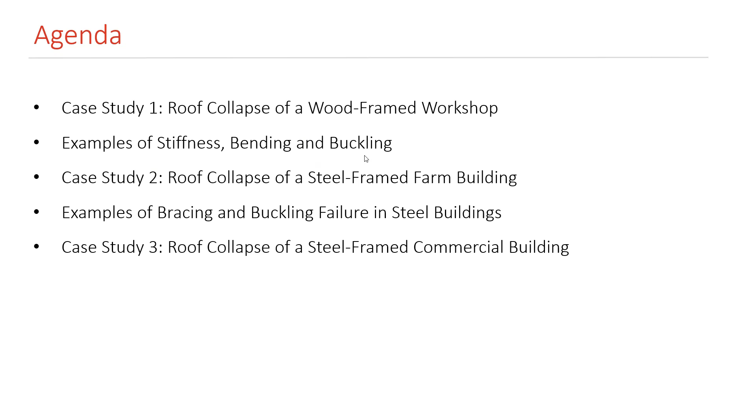In this presentation, I want to present 3 case studies. Case study 1 is roof collapse of a wood-framed workshop, and then I'll go through some examples of stiffness, bending, and buckling, and talk about the fundamentals of these 3 concepts in structural engineering. In case number 2, we'll talk about roof collapse of a steel-framed farm building, and then we'll give examples of bracing and buckling failure in steel buildings. Case number 3 is roof collapse of a steel-framed commercial building.

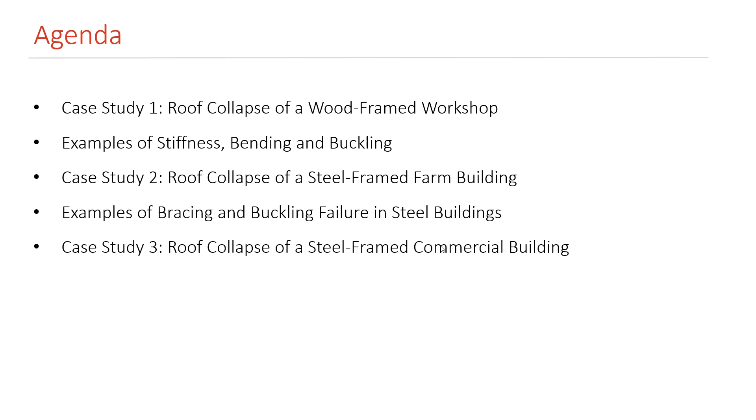Okay, so case study number 1: roof collapse of a workshop under snow. It was a mixed-use building. The areas included storage, workshop, and lean-to garage.

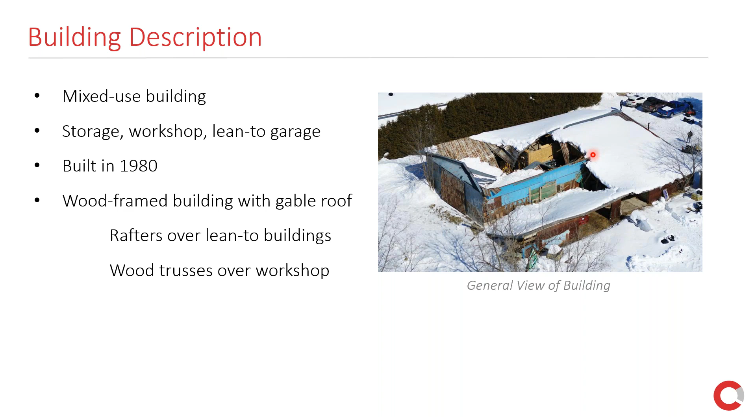This is the main area of the workshop, and there was a lean-to garage here. It was built in 1980, and it was a wood-framed building with a gable roof. There were rafters over the lean-to buildings. Here we have a lean-to garage, and there was another lean-to storage area here. The roof of these areas were framed by rafters, and there were wood trusses over the workshop. So the roof of the main building, the main workshop, was framed with wood trusses.

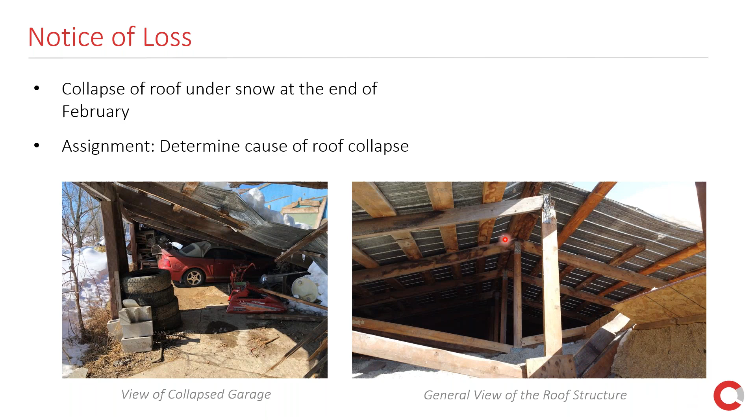So we started investigating. We attended the scene, took a look at the roof trusses over the garage, and also the lean-to garage, and also the trusses over the workshop and the rafters over the lean-to garage. The roof of the lean-to garage was framed with 2x10 rafters at 4 feet, and the roof of the workshop trusses -- we didn't see any lateral bracing between the trusses. Usually between the trusses there should be continuous horizontal bracing, complete with diagonal bracing. But we didn't see that; as you see here, there is none.

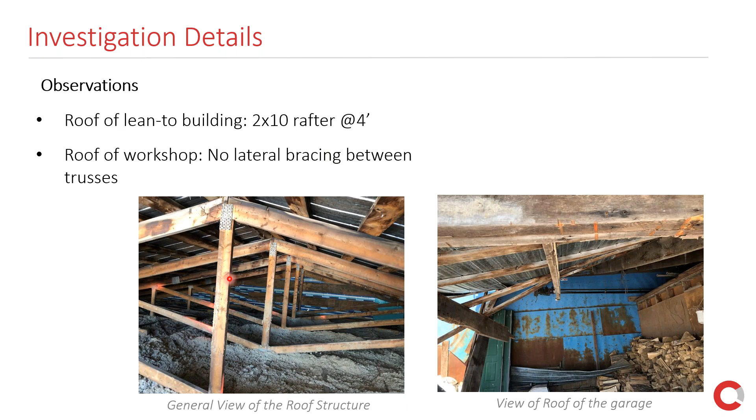Now, in this example, I want to particularly talk about the collapse of the roof trusses. For the lean-to garage, the rafters were not designed properly and they were widely spaced. But there are a couple of points I want to talk about regarding the collapse of the roof trusses.

So we did some code review to see why the roof collapsed. Maximum ground snow on the date of loss was 50 centimeters. Maximum wind gust on date of loss was 55 kilometers per hour. And this was a farm building, so we looked into the Canadian Farm Building Code of 1975. The design ground snow load was 3 kPa, which is equivalent to a design ground snow depth of 86 centimeters.

This means that if the building was built to satisfy the requirements of the code at the time it was built, it should have carried up to 86 centimeters of snow without collapsing. But it collapsed under 50 centimeters of ground snow load.

There's another thing I should mention here. When we say ground snow load of 50 centimeters, the amount of snow on the roof is different than the ground snow load. There's a formula to convert ground snow load to roof snow load. But regardless, those formulas are similar whether we go from actual ground snow load to roof snow load, or from design ground snow load to roof snow load.

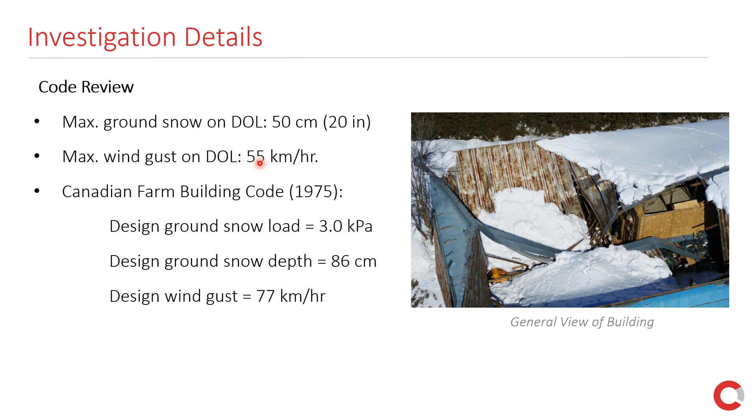If it was designed properly, it should have resisted the snow on the date of loss. Design wind gust was 77 kilometers per hour, so if designed properly, it should have resisted that. But on the date of loss, the wind gust was only 55 kilometers per hour. So at this point, we can rule out ground snow, snow load, or wind gust. These two are not the culprits.

Now, here's the thing. If everything is perfect, if the snow load is exactly uniform, if the material of the trusses is exactly homogeneous, and if all the trusses are exactly vertical, then no buckling or collapse would happen. But this is almost never the case. You have some irregularities in every structure.

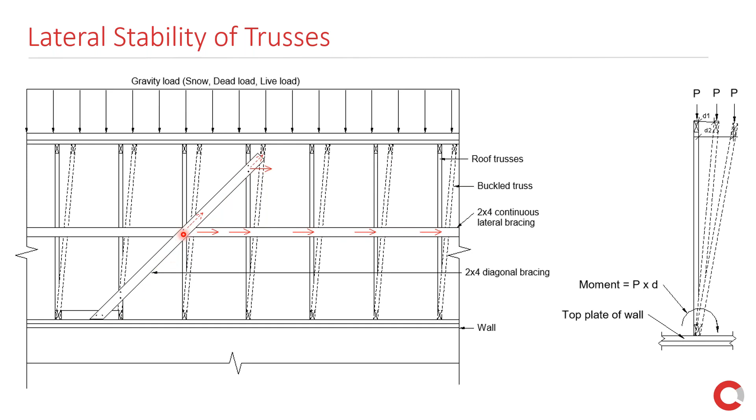Now, if you didn't have the horizontal brace, sure, the diagonal brace could prevent this truss and this truss from buckling or collapsing, but this other truss could collapse because it would not be connected to anything. So you need a horizontal brace—they call it collectors—to collect all the forces of other trusses and take it to the diagonal brace, from where the force can go to a support.

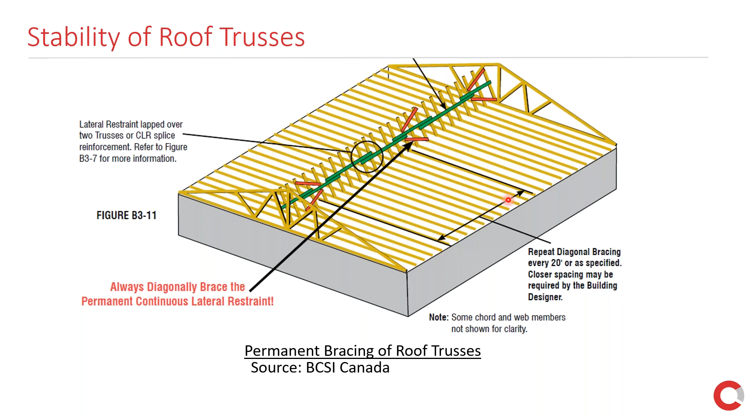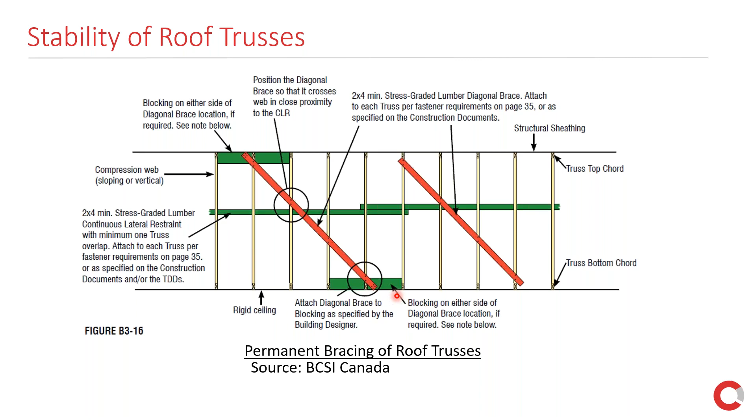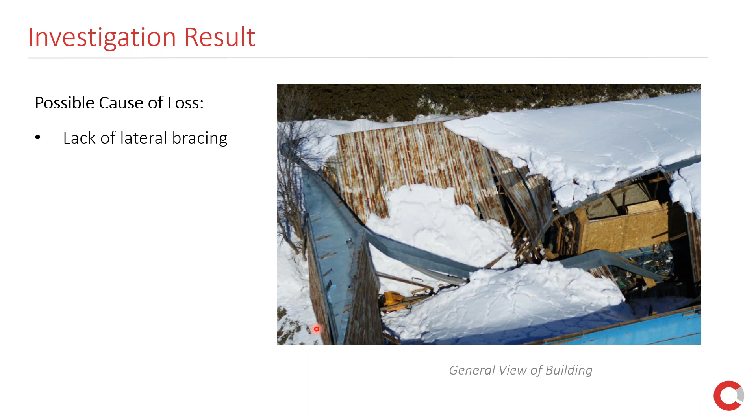So the possible cause of loss we determined to be lack of lateral bracing. Now, if the roof had been inspected before, the owner could have installed lateral bracing, and that would have prevented this collapse. So this is how it could have been prevented.

Before I go to the second example, I want to mention a couple of concepts in structural engineering. I want to talk about stiffness here. Stiffness is the difficulty to deform an object. The harder it is to deform an object, the stiffer that object is.

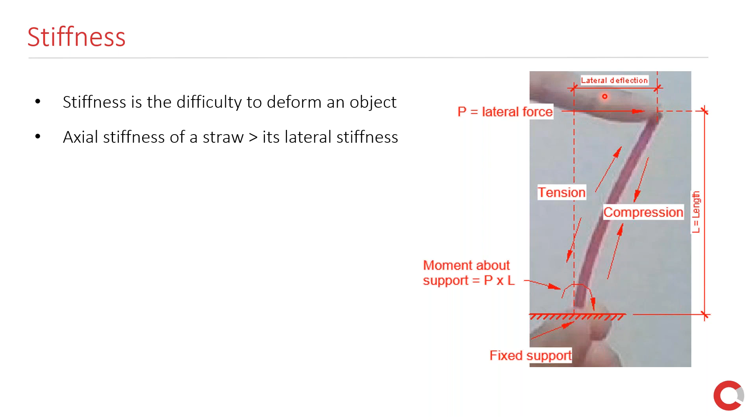For example, we say the axial stiffness of a straw is greater than its lateral stiffness, meaning it's stiffer in the axial direction. Here I'm holding a straw, and if I put a lateral force at the top, I can easily deform it by, let's say, 2 inches. I'll talk about these other forces later. Now, if I hold the straw at the bottom and try to pull on it, I cannot pull it by 2 inches.

So we say it's very stiff in the axial direction and very flexible in the lateral, or flexural, direction.

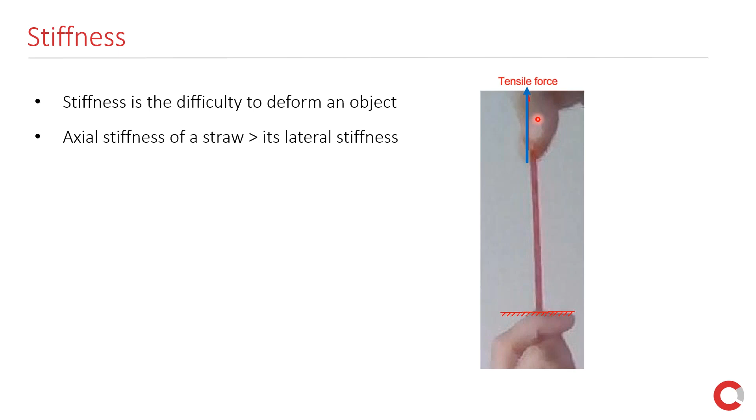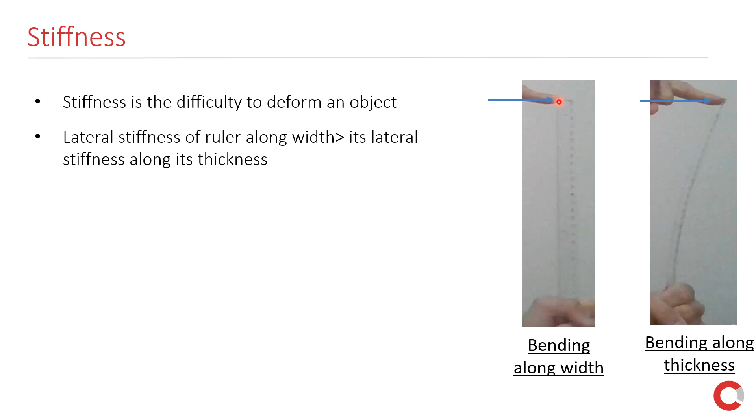Lateral stiffness of a ruler along its width is larger than its lateral stiffness along its thickness. Here I hold the bottom of the ruler, and I can easily push the top by 2 inches. But if I hold it the other way, I cannot easily bend it like that. So in bending, one side is in tension, the other side is in compression.

Imagine when you do a side stretch, one side of your body is in tension, the other side is in compression. Similarly, let's say you have a column. When it's under lateral load, which can be wind or earthquake, when it bends, one side is under compression and one side is under tension.

The bottom should be fixed to resist that bending moment, and this is how we show a fixed support in structural engineering. Now, if the bottom is not fixed, the column can easily tip over, so it should be either fixed at the bottom or have adequate bracing. The flexural stiffness depends on the cross-section of the member, its length, and its material.

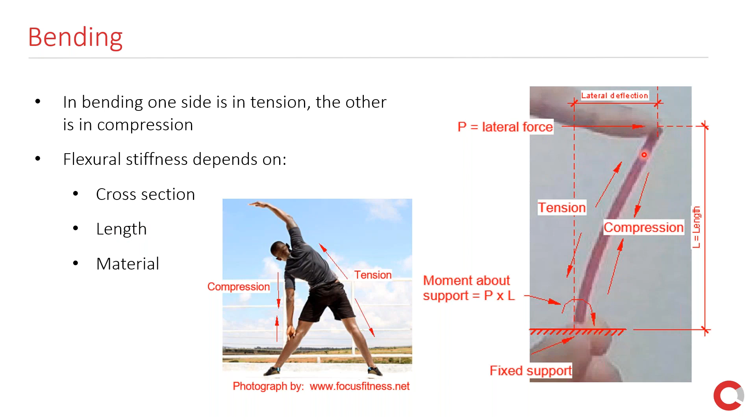For example, let's talk about the ruler. The ruler's cross-section is just a rectangle, with thickness and width. Not only is the cross-section important, but also the orientation of the cross-section with respect to the orientation of the force.

So the same ruler, if the width is along the force, shows very stiff behavior in bending. But if the thickness is along the force, it is very flexible. So not only the shape of the cross-section is important, but also its orientation with respect to the lateral force.

Length of the member is also important in flexural stiffness. Here I'm holding the bottom of the ruler. If I were to hold it at mid height instead, I would have to push eight times as hard to bend it by 2 inches.

Material is important too, of course. If it was a steel ruler, it would be stiffer.

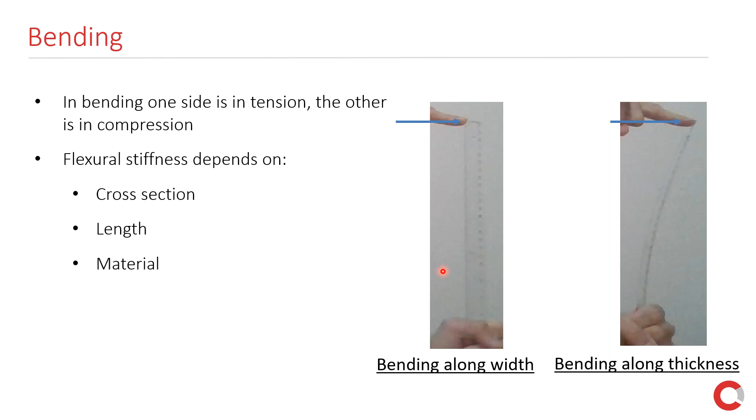The properties of the material in a ruler or any object can be different from one point to the other, just a little bit, but still different.

The ruler might not be exactly straight, it might be bendy a bit. The force might not be exactly at the centroid of the cross section, and for a column, there can be vibrations or wind, so there are lateral forces that make the column bend.

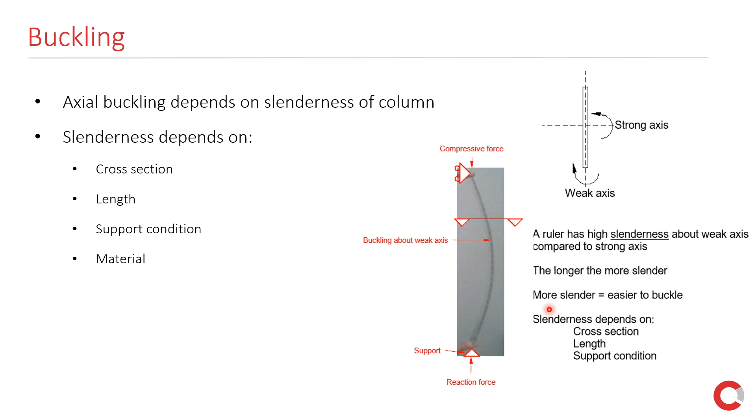The longer a column is, the more slender it is, and more slender means it's easier to buckle, and slenderness depends on these factors. Now let's talk about buckling mechanism.

Compressive buckling is due to a combination of axial force and progressive deflection. Under compressive force, let's say there is some very small deflection, d, at the midspan of the ruler. Here you have a pin, and this force P times this d creates a bending moment at the mid-height of the column.

Now, if the column does not have enough flexural stiffness, this d keeps increasing, and the bending moment keeps increasing to the point that it breaks. But if the column has enough flexural stiffness, this deflection increases a little but at some point stops. So buckling depends on the stiffness of the material.

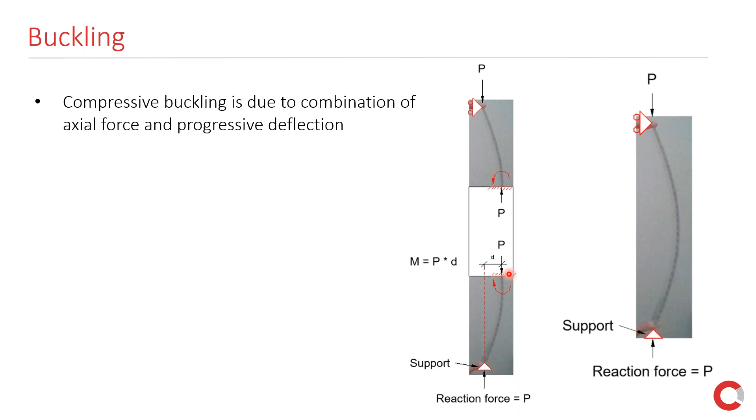Having said all this about stiffness, bending, buckling, and bracing, let's talk about case study number 2: roof collapse of a steel framed farm building. This was a steel shelter built in 1960, a 3-hinge portal frame on strip footing.

A portal frame has a pitched roof and columns. There are 3 hinges, 1 at the top and 2 at the bottom. When I say hinge, it means it can easily rotate. The cladding of the building was sheet metal panels on the roof and walls.

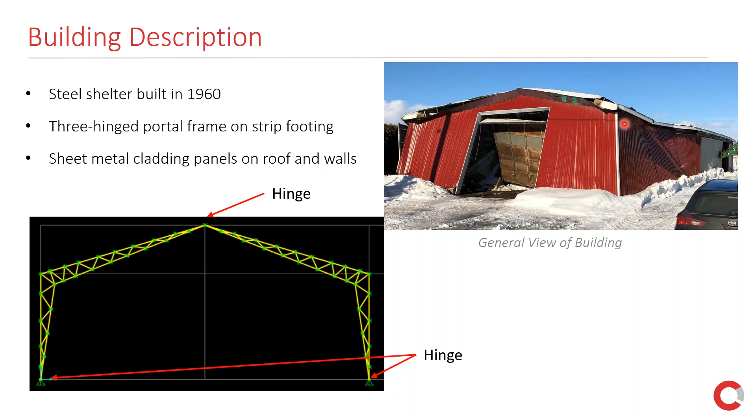You can see the general view of the building and of course the collapsed shape. This is the general view of the roof. You can see the roof steel trusses, and here you can see the vertical trusses.

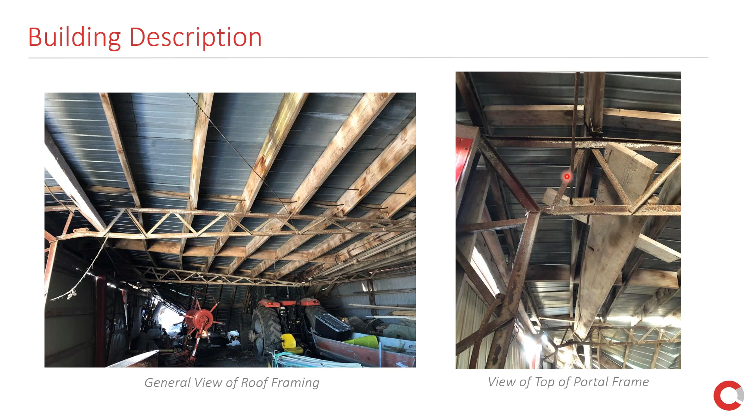Again, a part of the roof truss, and also these rods bracing the bottom chord of the roof truss. Another view of the roof structure, and the collapsed shape of the trusses.

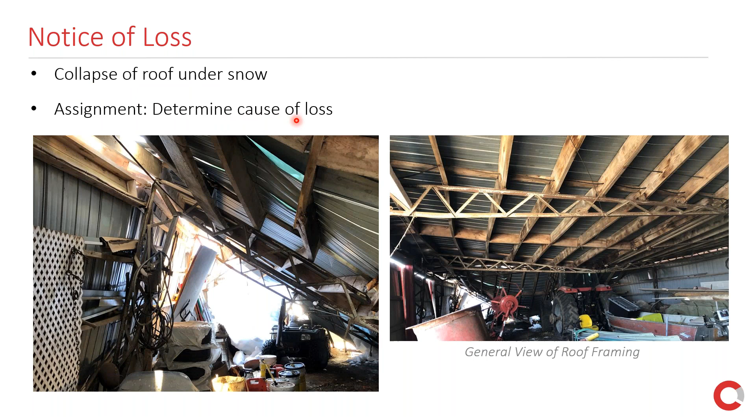The notice of loss was that the roof collapsed under snow, and our assignment was to determine the cause of loss. So we started our investigation, looking at the failure pattern or failure shape of the roof.

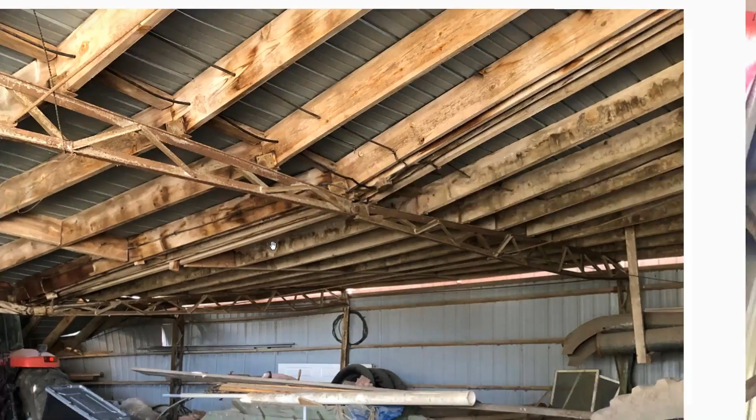You can see, first of all, this is the middle of the roof, and this is a hinge. I'm going to zoom in here so you can see this is a bolt, it makes it a hinge at the top, that's why we call it a 3-hinge portal frame. You can see these 2 trusses at the bottom have buckled in the same direction, so the bottom chord has kicked out to the right.

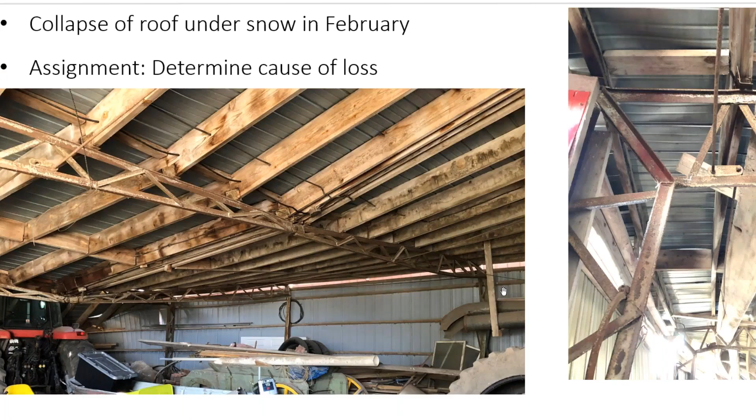Here's another view of the connection of the roof truss, the vertical truss, and the bracing. You can see the buckling of the chord again. This is the hinge, and this is the bottom chord.

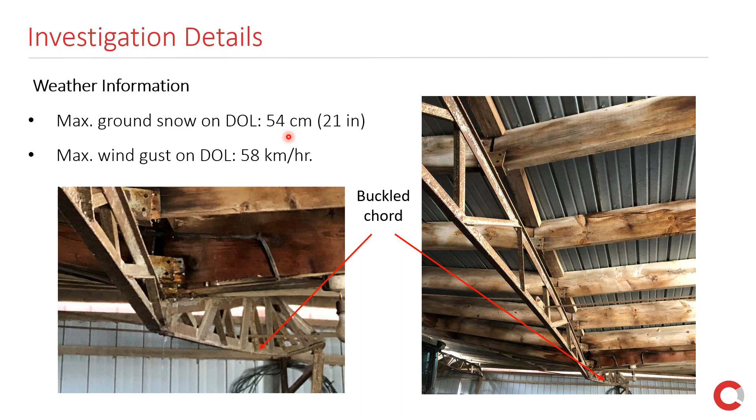We reviewed the weather information. Maximum ground snow on the date of loss was 54 centimeters, and maximum wind gust was 58 kilometers per hour. These values were below the design values, meaning if the building was designed to the building code of the time it was built, it could have resisted the loads. Having said that, at that time, in the 1960s, there was no building code in that jurisdiction to govern the construction of buildings. There was a National Building Code of Canada, but it was just a model code. It was not enforced in that jurisdiction.

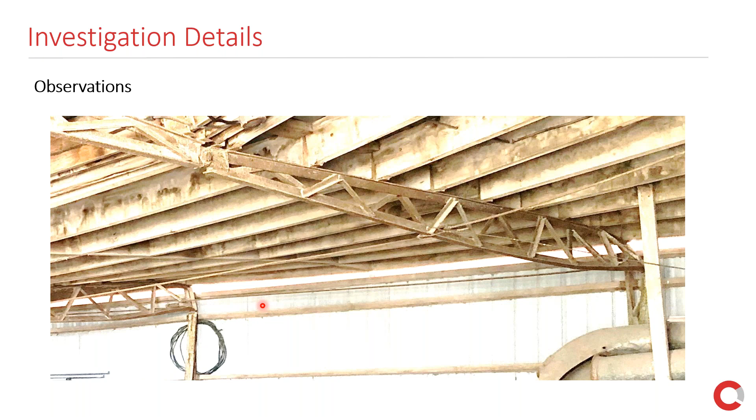Here's another view of the collapsed roof. You can see the trusses, the bottom chord has kicked out in the same direction. I'm going to talk about why that has happened. All we saw was horizontal rods supposedly to brace the bottom chords.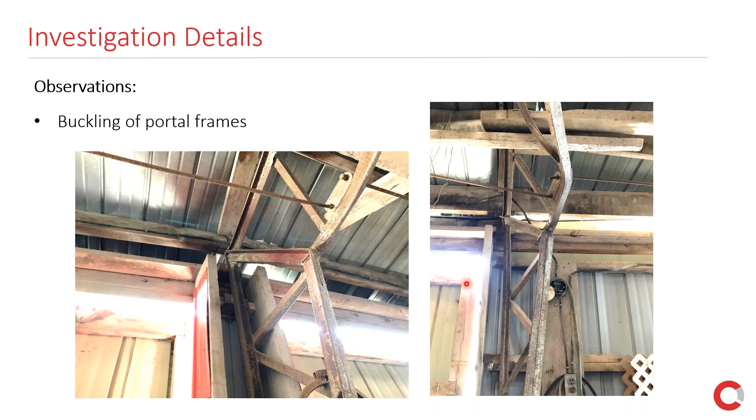Now, possible cause of loss: lack of adequate bracing. The reason is we only had horizontal bracing. If you remember from my first example, horizontal bracing alone is not enough, because all the bottom chords buckled in the same direction, and there was no diagonal bracing anywhere to prevent it from buckling.

Why did the bottom chords buckle? Because the bottom chords are under compression. Around the ends of the beam, the bottom chords are always under compression.

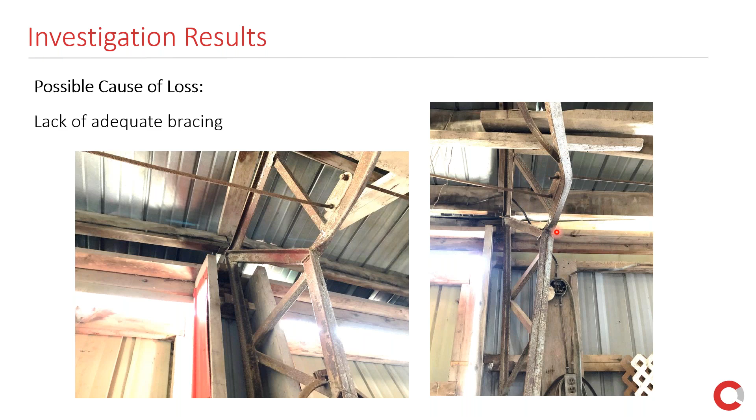Now I'm going to show you some examples of bracing in steel buildings. Here's a metal building. I'll zoom in to show you the bracing here. First of all, this cross bracing is tensioned steel rod bracing, which provides lateral stability to the building. You can see how small it is in cross section—these are just rods holding this building together.

So bracing constitutes a very small portion of the construction cost and material, but it's very important. You can have a very well designed building with large size beams and columns, but without adequate bracing and adequate detailing of the braces, it can collapse under just regular loading, regular wind, or regular snow. We call it: the devil is in the details.

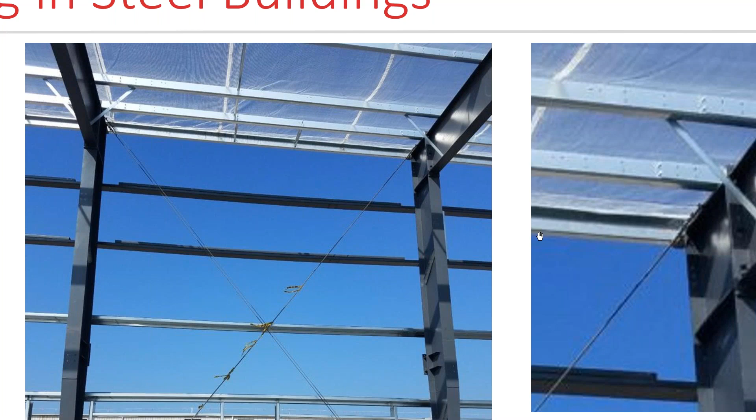Here it's showing the diagonal bracing of the bottom chord. In this particular example, there is no horizontal bracing between the bottom chords. That's okay as long as you have diagonal bracing connected to all bottom chords, which in this case they do. So this is one example of how it should have been braced. Our example should have had at least one diagonal brace at some spacing to prevent it from buckling.

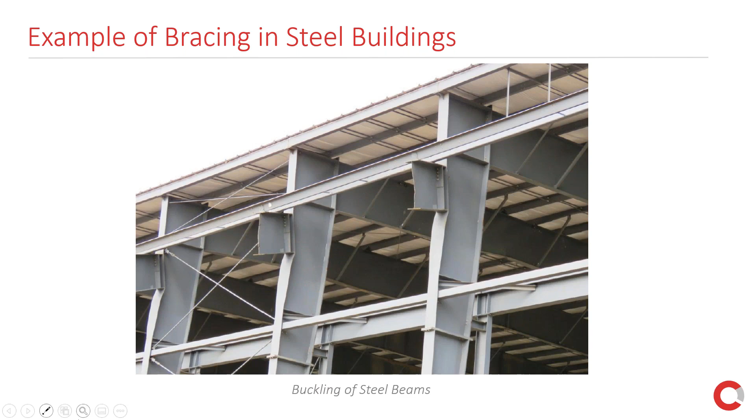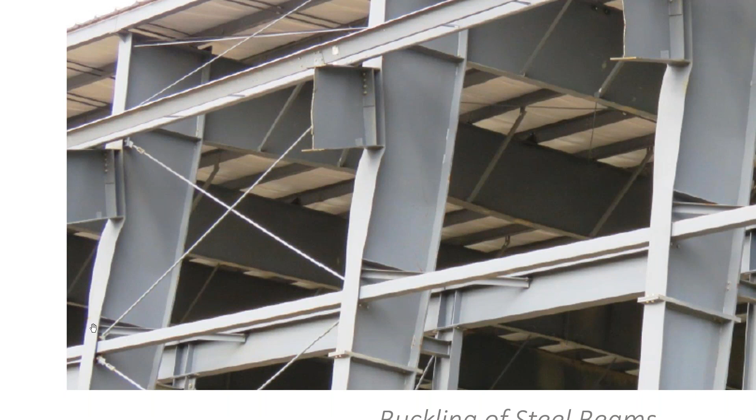Another example of a metal building. Part of this building collapsed because of a lack of temporary bracing, but here I'm going to show you something else. First of all, you can see cross bracing to hold the building together and prevent instability, and also diagonal bracing between the bottom chords of the beams to the joists.

Again, like I said before, under bending, one side is in tension and one side is in compression. For the beam, around the end of the beam, you have a bending moment, and because of that bending moment, the top chord or top flange is in tension and the bottom flange is in compression. Every time you have compression, you have a likelihood of buckling, and you have to check that. So to prevent that buckling, they installed diagonal bracing.

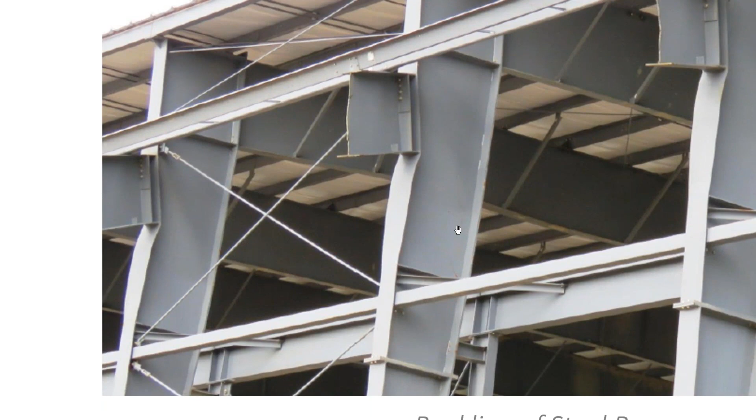Another example, better focus now. So here you have a beam, and you have a bending moment. Here it's under tension, and at the bottom it's under compression. This compression makes the web buckle. To prevent that buckling, all they had to do was put a plate here. We call it a stiffener—this is a stiffener.

This is an example of a stiffener. They should have installed a stiffener between the top flange of the beam and the bottom flange of the beam, here between here.

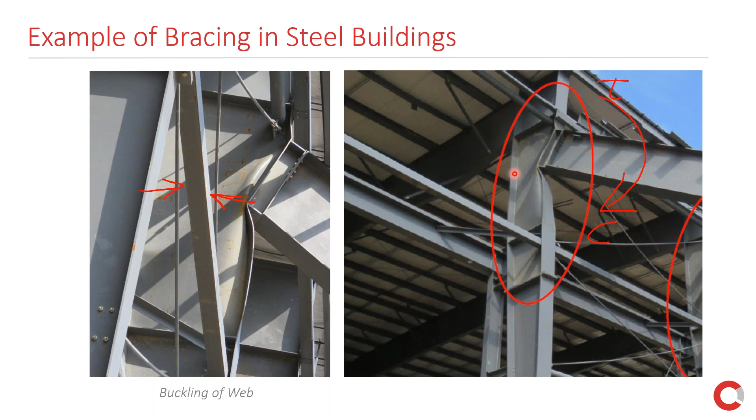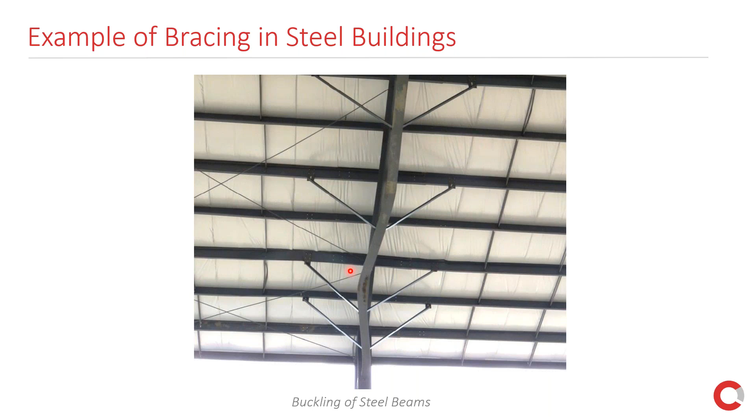Now, here I'm showing in this building the diagonal bracing of the bottom chord of the beam, and yet it has buckled. I want to make a point here: the braces, whenever you brace something, it has to have enough stiffness. Buckling depends on stiffness, as I explained in the case of a column under buckling and how it depends on the flexural stiffness.

So here, yes, it has braces, so the brace takes the compression. When it takes the compression, it brings the force to a reliable support, but it brings it to a joist, which is fine as long as the joists were designed for that. But here the joist could easily bend, and when it can bend, the stiffness of this brace is now compromised because of the bending of the steel joists. So the bottom chord could easily buckle because the braces were not effective.

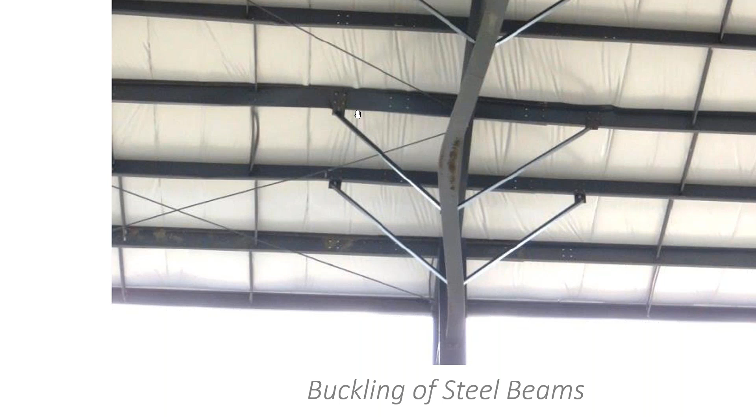Now, case study number 3. It was collapse of the steel structure of a commercial building, a commercial building of structural steel construction. If a part of it was under construction, the first phase of it was fully constructed.

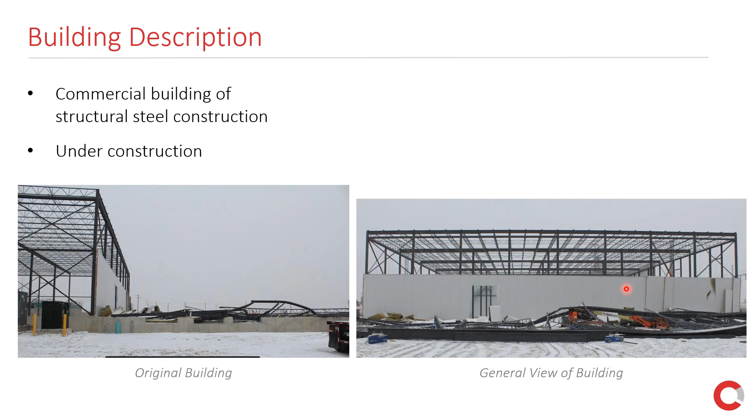And this is the original building, general view of the building. So notice of loss was that the roof suddenly collapsed. Sudden collapse of the roof, and our assignment was, like always, to determine the cause of the roof collapse. So we took a look at the collapsed members.

So here you can see the bridging between the steel joists, and this is the roof girder.

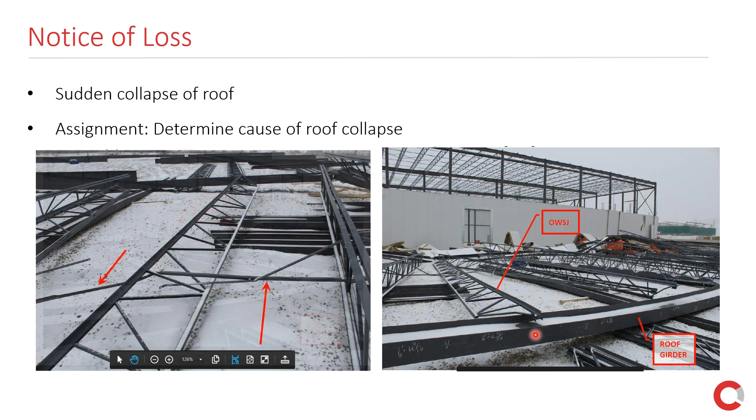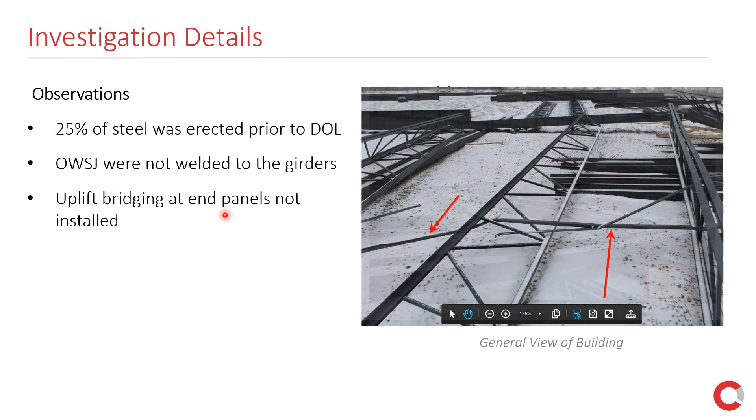25% of steel was erected prior to the date of loss, and the open web steel joists were not welded to the girder, and uplift bridging at end panels were not installed, and also temporary bracing between the columns were not installed. So essentially what you have is similar to our first example.

So you had a group of columns, there was no temporary bracing between the columns, and you had the steel joists from above. And in this case, you remember I said if you get a small deflection because of P times delta, it creates bending moment, and it eventually makes the roof collapse. Here, you also had the effect of the wind.

So this is a worst case scenario. Not only do you have the risk of instability because of irregularity of loading and irregularity of material properties, or out of plumbness of the columns, but also you had wind. And this wind alone could create enough deflection to produce enough bending moment for the column to buckle, or for the column to collapse.

And of course, the bottom support of the column was not designed for bending moment. These industrial buildings are usually braced with cross bracings, usually steel rod bracing, so the bottom of the columns are usually pinned or hinged.

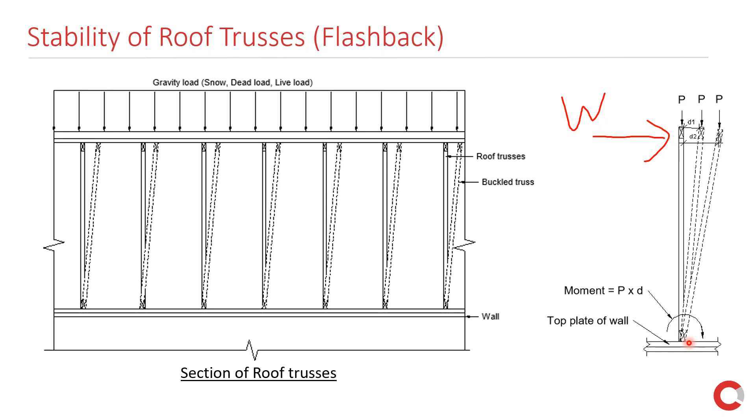We did some code review, and it's important to note that it is the installer's responsibility to install temporary bracing, and there was no temporary bracing installed in this building. This is according to the CISC Code of Standard Practice, and as per AISC Design Guide number 10, wind speed for temporary bracing can be reduced by 20%. So for temporary construction, when you put temporary bracing, you don't have to design it for the full design load of the code.

You can reduce that by 20%, which is understandable because what are the odds that you get the highest wind in 50 years during that construction period? It's a very low probability, so it allows you to reduce the design wind speed by 20%.

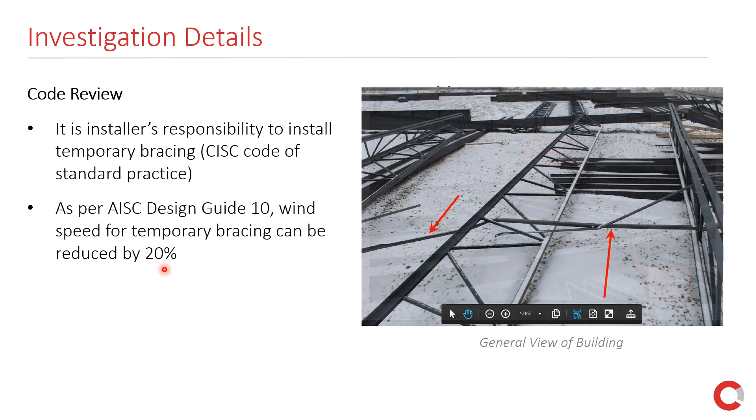So if the temporary bracing was installed, it would not have collapsed. So adequate bracing was not in place. This is our investigation result: adequate bracing was not in place.

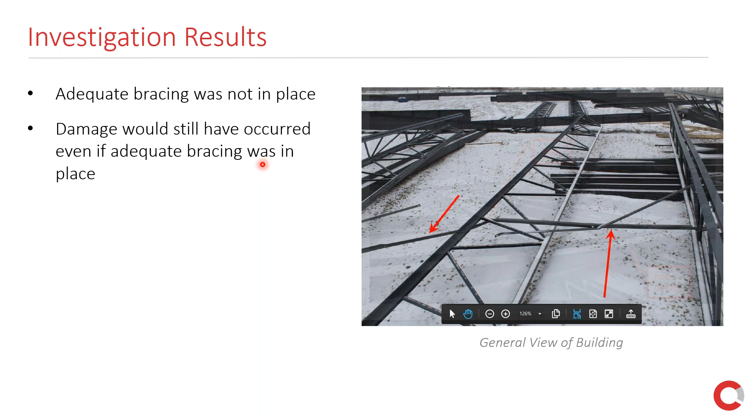Damage would still have occurred even if adequate bracing was in place. On the date of loss, the wind was really high, and it could have resulted in some deformations and such, but it would not have made the building collapse like this if the temporary bracing was in place.

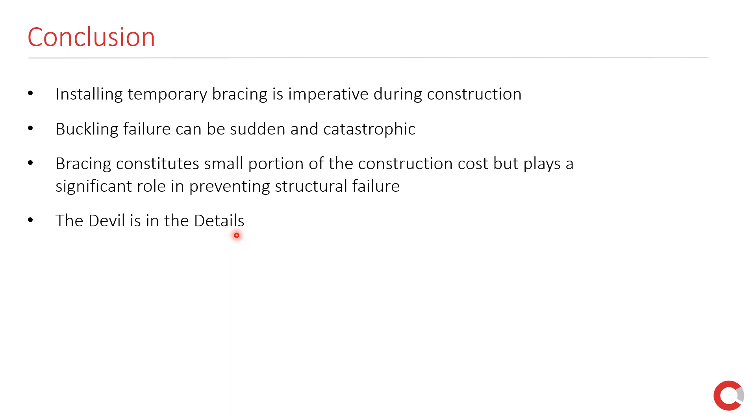So again, installing temporary bracing is imperative during construction. Buckling failure can be sudden and catastrophic. Bracing constitutes a small portion of the construction cost, but plays a significant role in preventing structural failure. And we say the devil is in the details, so it is very important to pay attention to bracing and its details to prevent catastrophic and costly collapse.

Thank you very much for your attention, and I'm glad to address any questions.